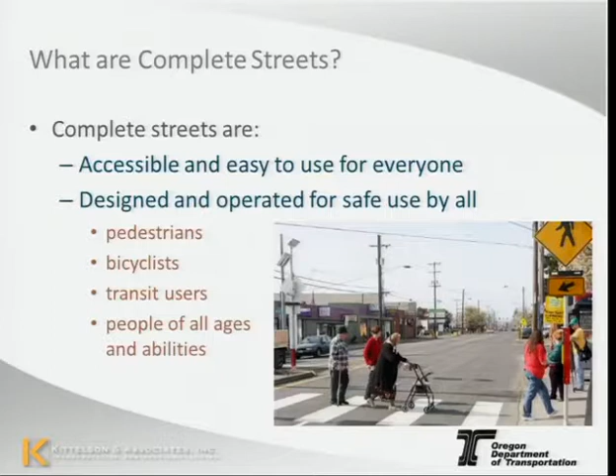Why do complete streets matter? Well, streets are a big part of urban space. I just got a number this morning. Metro did an analysis of the amount of land area in the metro area that's taken up by right-of-way, and it is close to 19 or 20% of our land area that's taken up by public right-of-way for streets. So it's a huge occupier of space.

Streets are not just our corridors for getting from A to B, they're also our living spaces, our living rooms. Streets have many functions, yet in the U.S., in this day and age, many streets are designed primarily for cars and continue to be improved for cars only.

Having complete streets is a good idea to meet many goals that cities and counties and the state have. Offering transportation choices by accommodating all modes, accommodating the needs of all users, which includes the young, the old, the disabled, and those who take care of the young, the old, and the disabled, and sometimes are the young, the old, and the disabled, which is women. And what makes a good street for women is not always the same as what makes a complete street. So, every user has their own needs.

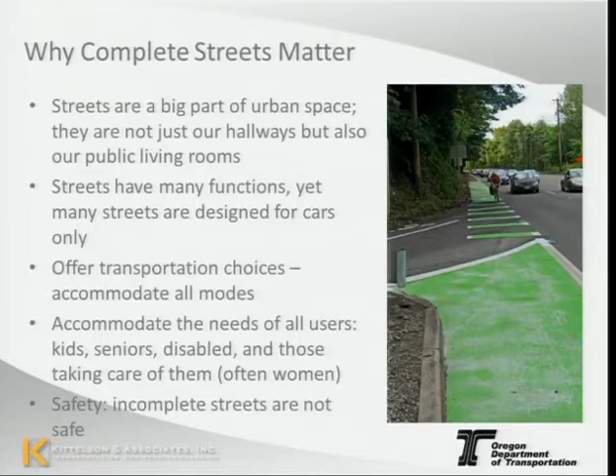More reasons why I think complete streets matter: to help meet greenhouse gas reduction targets by reducing vehicle miles traveled, to improve public health outcomes by encouraging active transportation - that's walking and biking and also walking to the bus. So transit is an extension or a part of active transportation. By providing safe and convenient access to public transit, so supporting transit. And by offering, since we both work for ODOT, offering alternatives to the use of state highways for trips that don't belong on state highways, for the short trips that can easily be done by other modes.

There is a National Complete Streets Coalition that has been advocating for complete streets policies and is kind of tracking the adoption of complete streets policies and plans, et cetera, all over the country. So they came up with a list of 10 elements that a good complete streets policy should have, and on the National Complete Streets Coalition website, there's a number of resources. They define these elements. They've also done a lot of research. They've had a couple of annual reports out now where they're keeping track of who's adopted and what are good examples of complete streets policy.

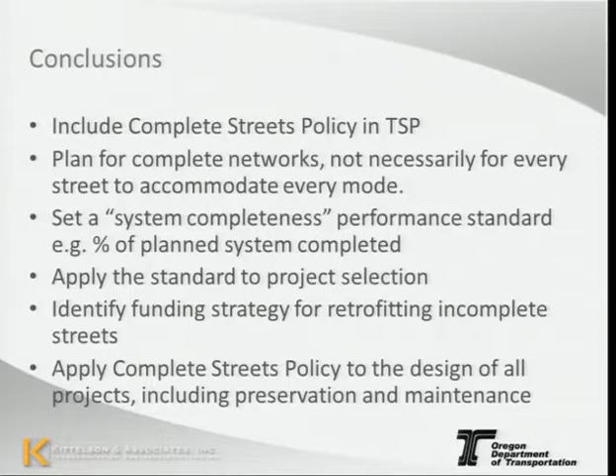Where is it? Not wearing a very microphone compatible outfit today, but no, I'll figure it out.

All right, so Lidvine's been talking a lot about the policy element of complete streets and some of the gaps that we have in between relying on the complete streets policy and getting us to actual on-the-ground implementation of complete streets. So what I'm going to go through now is just talk about some of the basic elements of complete streets implementation that we've found have been really helpful to address more thoroughly as you go through your planning process and your project development process.

A lot of examples of how we've incorporated these elements into local transportation system plans. And when we put this together, it was really focused on, our main audience was local jurisdictions, and this was kind of a scoping guidance presentation. But I think as a predominantly student audience, it's a really good series of examples too, because a lot of these, as we go through them, you'll see are pretty basic GIS exercises that you can add on to the typical work that goes into transportation system planning. So could be good class project material or something like that.

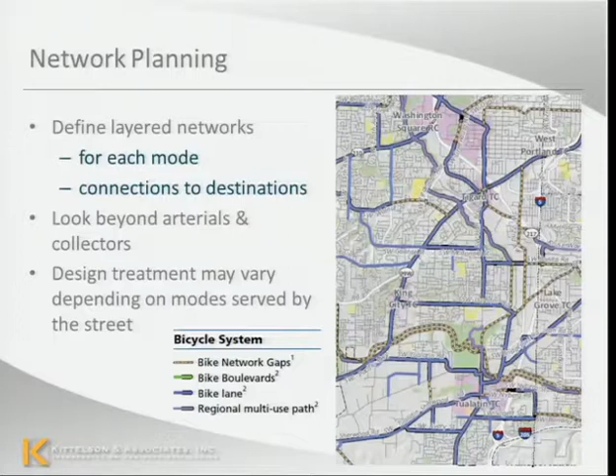And the City of Portland does this really well. They've got a different functional classification for bikes, for pedestrians, for emergency vehicles, for freight, and for cars and transit. I think there's 7 different layers, maybe. Somebody from City of Portland could probably confirm this.

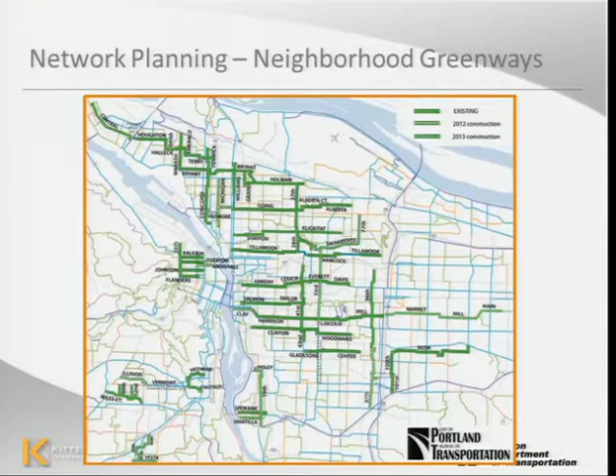But they've also got the Neighborhood Greenways program or network, which has been really great for identifying a separate network of bicycle and pedestrian-friendly routes that utilize your low-speed, low-volume existing network and completing the streets that way. Because a lot of the time when you really focus on, well, we'll put bike lanes on all the arterials, yeah, you're making a bike network, but it's a bike lane next to 5 lanes of traffic that only your strong and fearless riders are going to use. So this alternative network planning approach is really helpful in terms of not only utilizing what you've got in terms of infrastructure, but also attracting a new group of users.

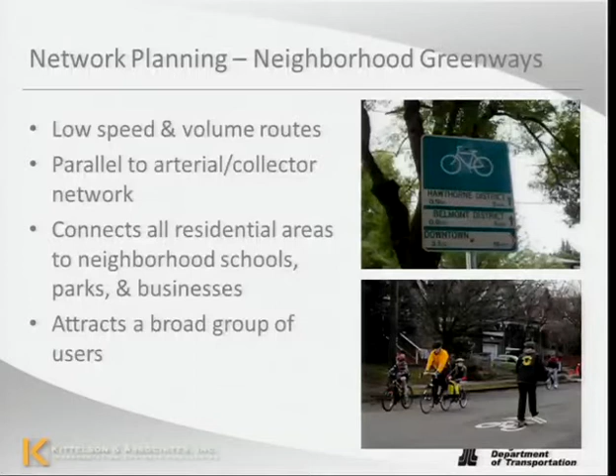And the city's had really positive feedback from that approach, results from that approach.

The Metro Mobility Corridors approach is kind of similar. This is the approach that Metro has taken for the region in the Regional Transportation Plan, and again, this looks at...

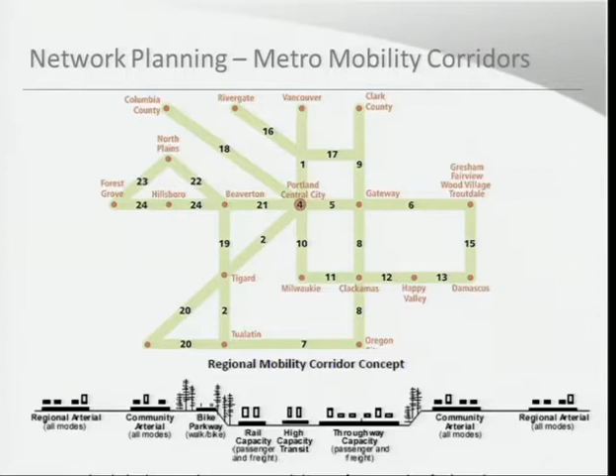Accommodating all users, but within a corridor, not necessarily all on one arterial. So take, for example, the corridor between Portland Central City and Milwaukie. You've got the Portland-Milwaukie Light Rail Corridor, McLoughlin Boulevard that provides your freight and auto mobility, the trolley trail, and parallel routes that are low-stress pedestrian and bicycle. This also has an influence on the land use and development patterns in the area, too.

Connectivity is the next big area that we've really worked with local jurisdictions on in the planning process. Again, just looking beyond the arterials and collectors and making sure that not only are these streets complete, but you've got a dense grid of local streets to provide the connections.

So really starting to look at some of the short connections that you can make within your network that are going to have a much greater impact on connectivity and access than just focusing on having an arterial every 1 mile within your network.

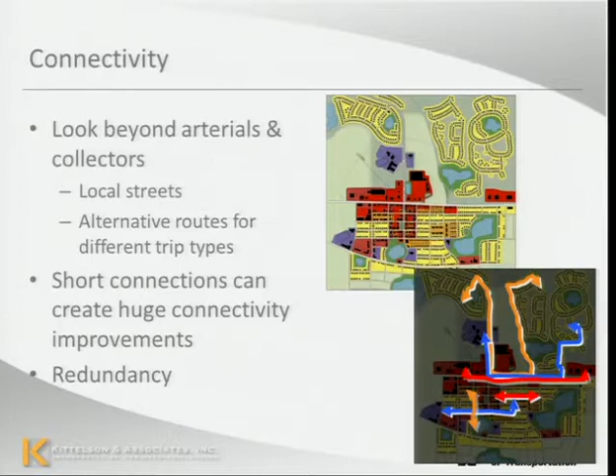So this is one example of a GIS exercise that we did for Prince George's County in Maryland. This is the Blue Line Metro Rail corridor that goes from Washington, D.C. out into a suburban area.

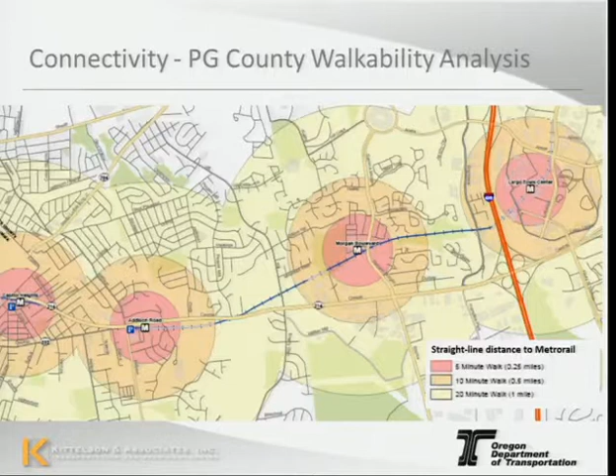And we're just visualizing, in an ideal network, these are the areas that you could walk to from each metro station in 5, 10, and 20 minutes. But when you look at your actual street network, what you can access doesn't look anything like that.

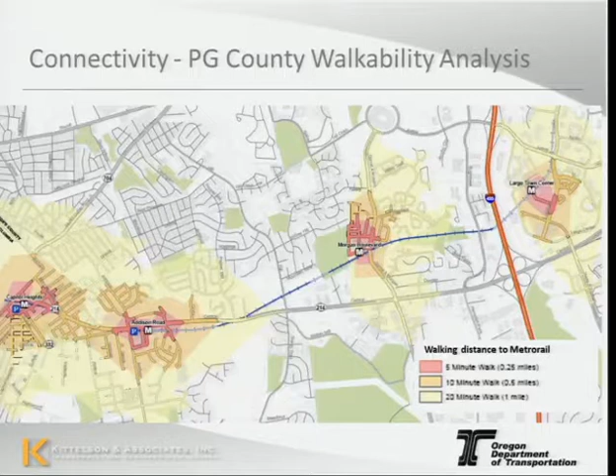So we really use this exercise at public meetings to start looking at what are the really short connections like this that you can make with your constrained budget as a city, to maximize access and connectivity around your transit stations, and really capitalize on that investment rather than continuing to widen this already 7-lane arterial here that connects all of...

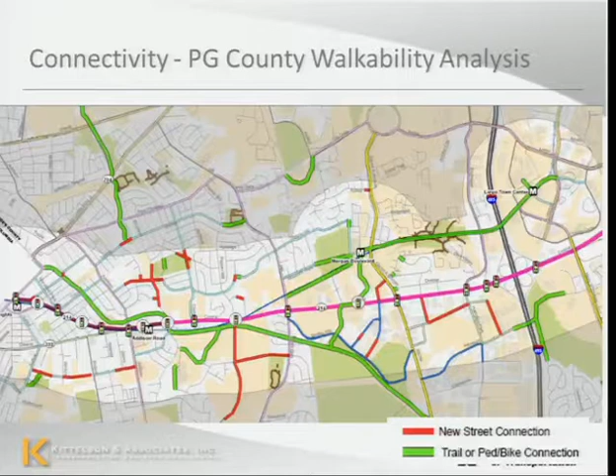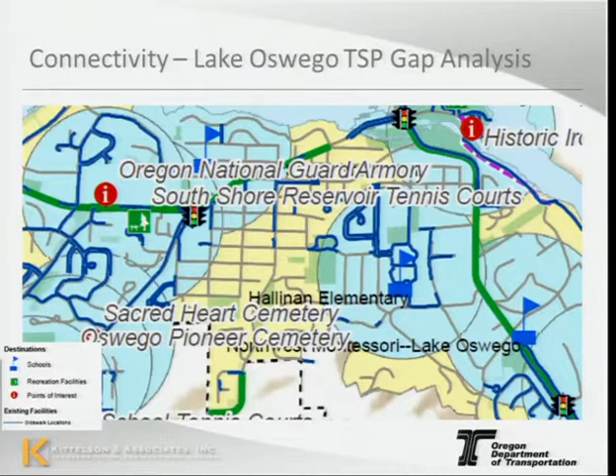This can be a really hard exercise to try to do, particularly if you're a consultant or you're new to an area, because these little connections—you have to know the neighborhood really well.

So luckily, we have the combined forces of internet and community that can now be harnessed to help us with a lot of this work, which is what we did for the City of Tigard's Neighborhood Trails Plan. Basically, we just put together a free Google map of the city and asked people to mark: what are the shortcuts that you take?

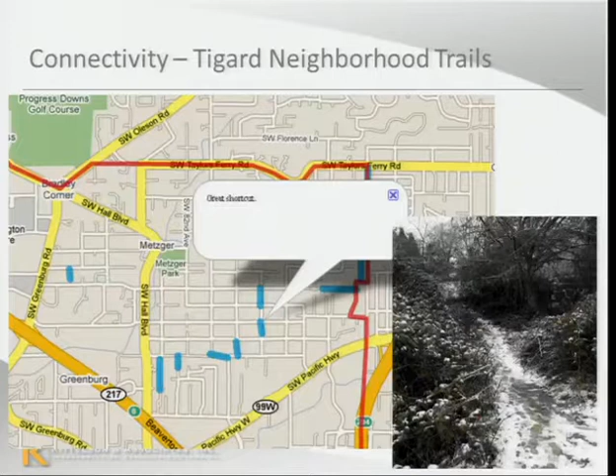Where are the places where there isn't a connection or a street right now, but you walk through anyways, so it's something we could formalize to improve and complete the network. I think 80 of the 100 connections that ended up being in this approved plan came from this free online Google Map interface. So, really effective approach.

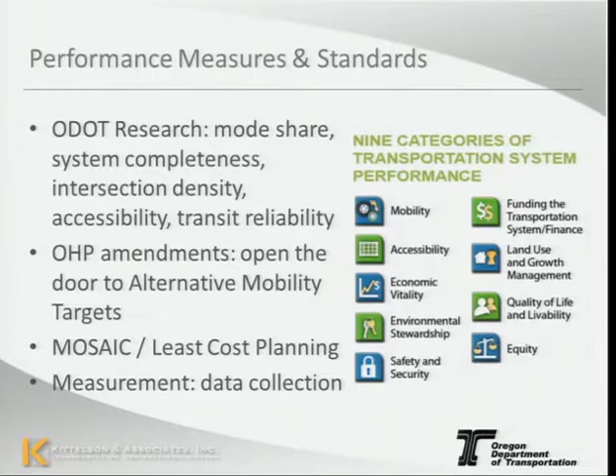The primary example of that is multimodal level of service, which is now in the 2010 Highway Capacity Manual. Mostly this considers whether you have facilities for bicycles and pedestrians, whether there's buffering between them and traffic, and what the speeds and volumes of vehicles are that they're being exposed to.

It works really well in the transportation system planning process for looking at alternative cross-sections or design approaches for corridors, and looking at your network to see where the really good service level areas are and where the really bad ones are that we want to build up more. It doesn't work so well for site development review, looking at cases like, we're adding 80 new cars—what's this going to do for the bicycles and pedestrians in the area?

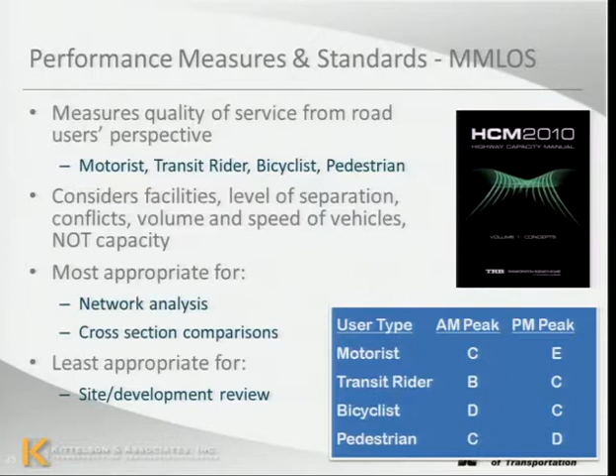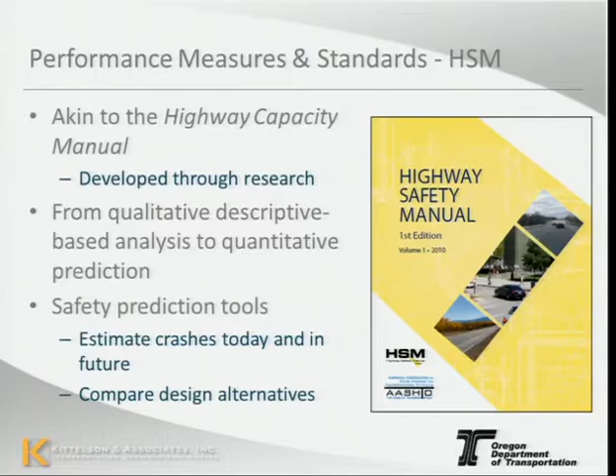So those are some resources you can look at more. Design guidance is another big group of tools we've been working on in a lot of TSPs, because when you're looking at new objectives for your street network, you really need new design treatments to achieve those objectives.

This involves looking at more than just adding bike lanes to your cross-section—what are some of those traffic calming design elements and other things you also want your designers and engineers to start considering. This really involves a lot of ongoing staff education, just to keep people aware of best practices and the practices you want them to consider, as opposed to, this is an arterial, this is our arterial standard details, this is how we design it.

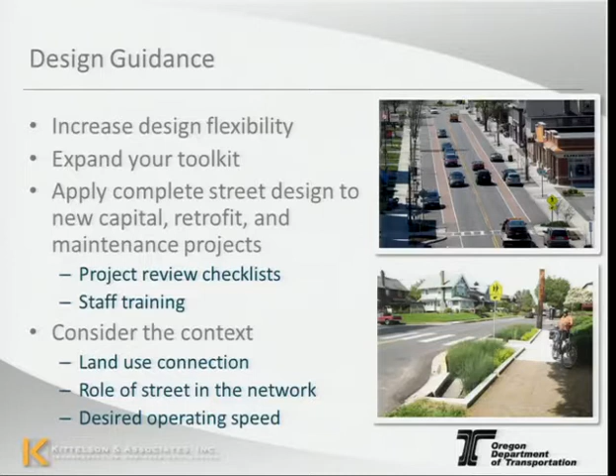Getting that continuing education on new approaches and how they're appropriately applied, and a lot of the time putting together some sort of review checklist for projects, so you have documentation of what plans you looked at when you did the design, what you considered, and why you're going with the design approach you chose.

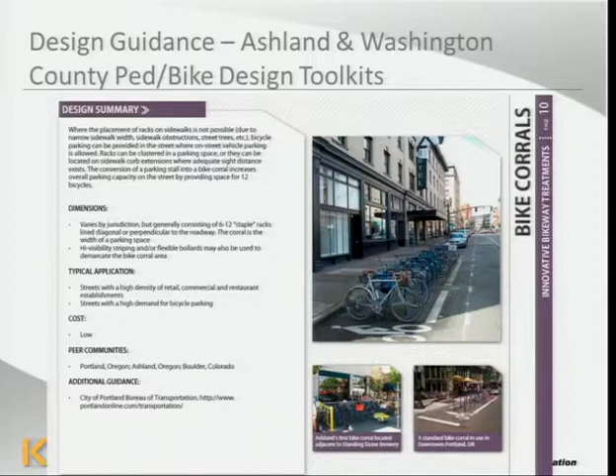For Ashland, Oregon, as part of their TSP, when I was at Kittelson and Associates, we created a bicycle and pedestrian design toolkit as an addendum to their transportation system plan. It basically goes through a new toolkit of on-street bike parking, buffered bike lanes, and other things they hadn't really been using as design tools before, giving guidance on basic dimensions and appropriate applications for use in Ashland.

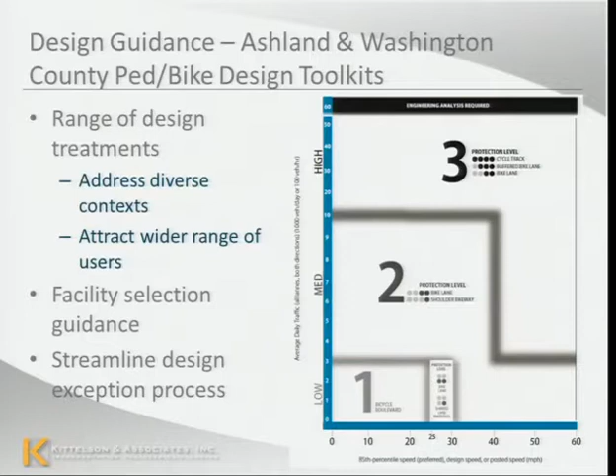Washington County's bike design toolkit is very similar, but just focused on bike facilities. It also gives a facility selection guide that says, based on the speeds and volumes of different streets, what types of bike facilities you want to look at on different corridors, and streamlines the design exception process if you're going to use those facilities in the county.

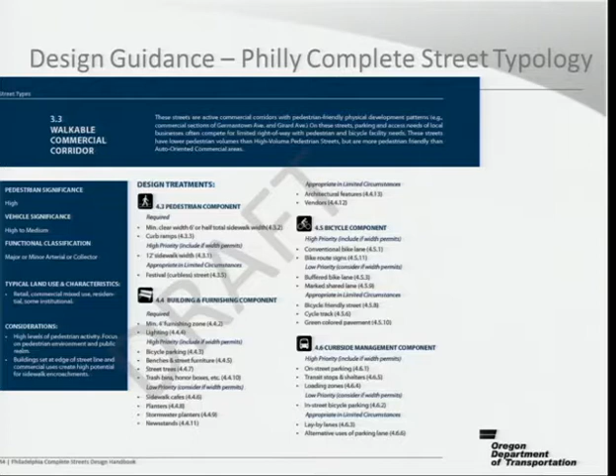Philadelphia's Complete Streets Design Handbook takes a different approach. Unlike the Portland approach, which makes a separate functional classification for bikes, pedestrians, and freight, it keeps the functional classification for vehicle streets but adds a separate complete streets typology with design guidance as an overlay. So based on the vehicle functional classification, plus the surrounding land use, a high priority for pedestrians, and a moderate priority for transit, it tells you what design features to consider in the pedestrian realm and in the furnishing zone. It's a pretty thick guide, but a really interesting different approach.

Seattle has a complete streets checklist, as I mentioned, that for every project in Seattle you go through and document: did you look at the bike plan for the city and consider the improvements that plan recommends for this project? Did you look at these other elements? So you can document what you've reviewed, and if you didn't pursue a particular plan or treatment that was recommended, what's the reasoning, and how are we going to reconsider getting to that approach in the future.

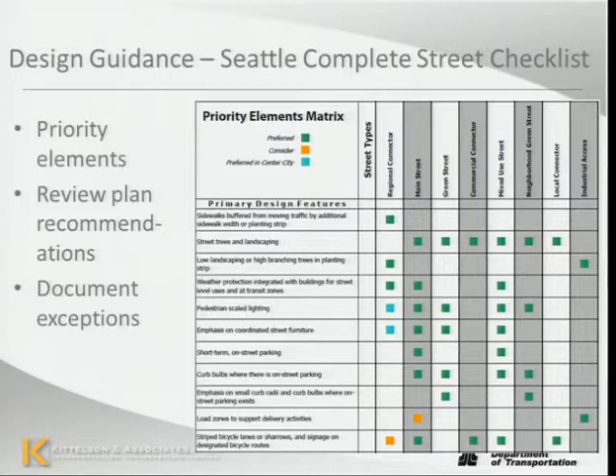Basically, we're finding that some people have really good quantitative approaches to identifying and prioritizing complete streets improvements. Some folks are just going completely based on opportunity, what can we fit in with our planned preservation projects.

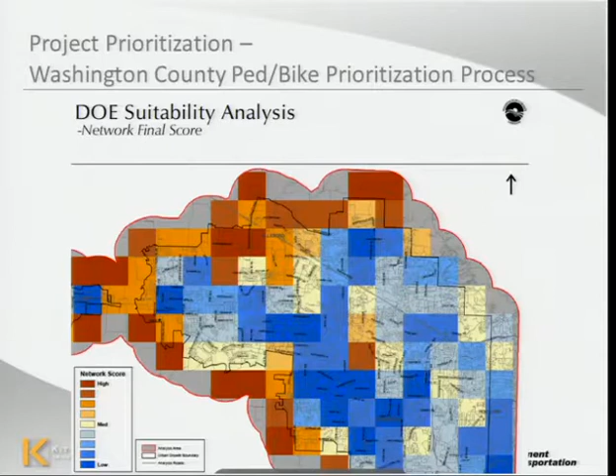One example of a really quantitative approach in the local area is Washington County, which got a grant from the Department of Energy to do a bicycle and pedestrian prioritization process. This is a GIS analysis looking at land uses, density, social factors, how supportive an area is of pedestrian and bicycle infrastructure, and whether it generates trips or has high need. Then they did an overlay analysis to find, in these high trip-generating areas, where are the gaps and opportunities, followed by a feasibility analysis to determine which gaps in high-need areas are doable, generating a list of about 25 to 50 priority projects out of this process. A pretty quantitative approach that'll help them line up projects in the future.

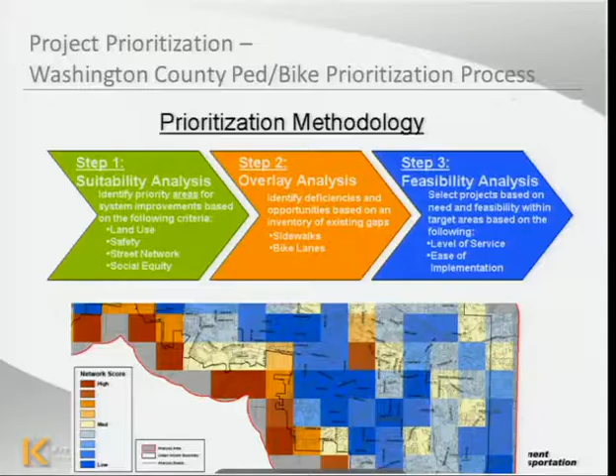Last but certainly not least, funding is an issue to tackle not only in complete streets but in all transportation decisions at this point. One place where we tend to get caught up a lot with complete streets implementation is we have a corridor planning process, we envision our future cross-section for our complete streets corridor, and step back and say this will all be implemented as the area redevelops. That's great if you've got your network plan done and your design standards for this new cross-section already implemented, and if your entire corridor is going to redevelop in a short period of time, but very rarely does that happen.

So one of the other funding measures a lot of communities use is a transportation system development charge, where developers who come in pay a fee based on the number of trips they're going to generate, and that funding can be used to do more than just frontage improvements on their parcel. It can fund improvements needed along the whole corridor. The problem with that approach—and we have 10 minutes, so I'll be quick—is that a lot of those methodologies are just based on your ITE trip generation manual estimates of how many vehicles this development is going to generate. So you have a legal problem: this fee is based on vehicles, and you can't use that fee to just do something for pedestrians.

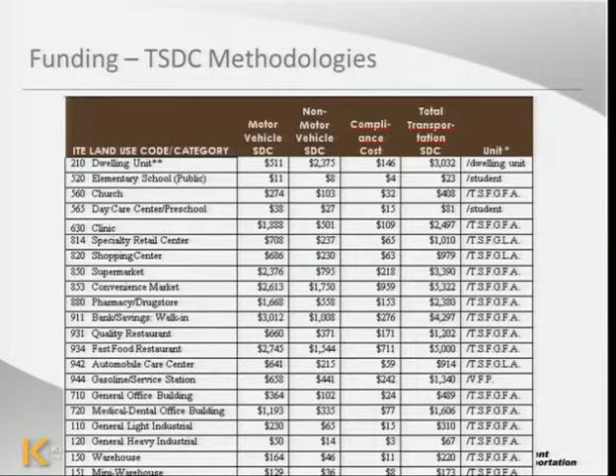So with that, that was a lot. But yeah, I'd be happy to discuss and answer questions.

So sort of going down to the funding issue, I know that ODOT has control of some streets and PBOT has control of some streets, and right now PBOT's facing a pretty harsh budget in terms of complete streets. They're proposing cutting basically all pedestrian and bike new infrastructure in the budget in favor of maintenance. I'm wondering, does ODOT have any way of mitigating some of the consequences of a PBOT budget that doesn't really allow for pedestrian and bike network connectivity?

Well, I think one way that ODOT and the local jurisdictions have been working together a little differently on the funding approach in the last year is how we've approached ODOT's main funding planning process, the Statewide Transportation Improvement Program. We're currently planning our 2016 to 2018 STIP, and this is the first time we've split all of our funds into two different pools that we're calling Fix It and Enhance It.